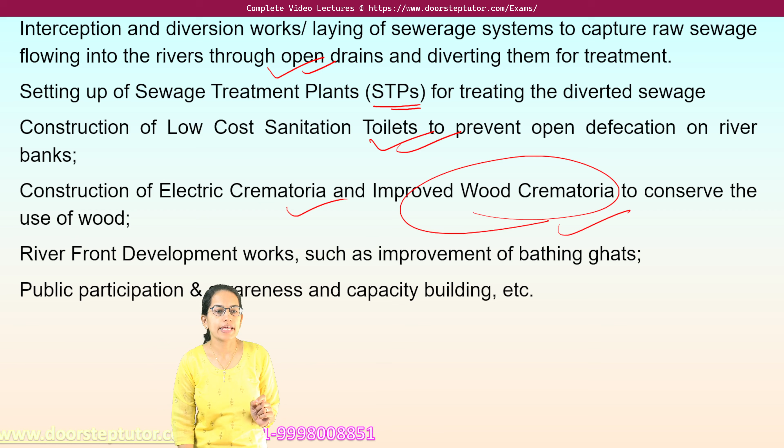To begin with, the ideas that have been laid down under NRCP are: to check out the sewerage lines, to capture the raw sewage which flows into the river through open drains; have STPs, that is sewage treatment plants, as and where required, and divert the sewage wherever required; build low cost sanitation toilets; bring electrical crematoriums or improved wood crematoriums to conserve wood in case it is a wood crematorium; and development of bathing ghats, development of riverfront parks, people's participation, awareness, and educational programs, and so on.

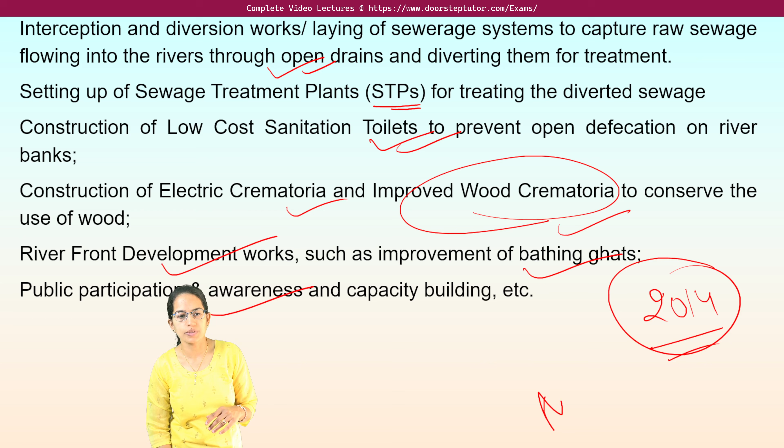From 2014, all the works related to Ganga and its tributaries have been transferred to Ministry of Water Resources, River Development and Ganga Rejuvenation. That means Ministry of Environment, Forest and Climate Change is implementing the projects for all other rivers except Ganga. For Ganga river, it falls under Ministry of Water Resources, River Development and Ganga Rejuvenation. That's really important to understand.

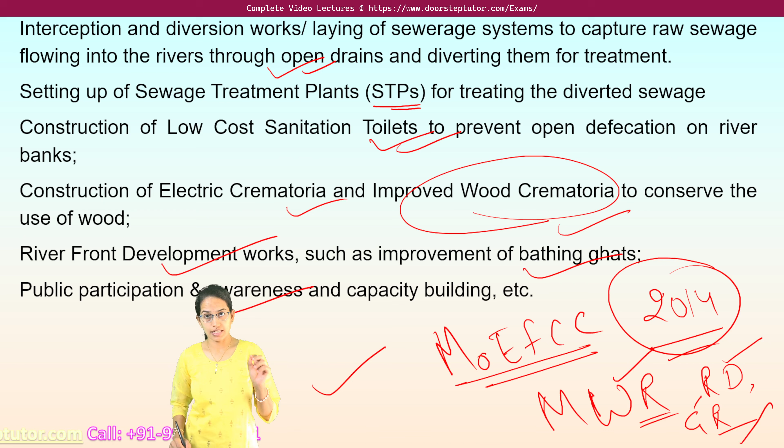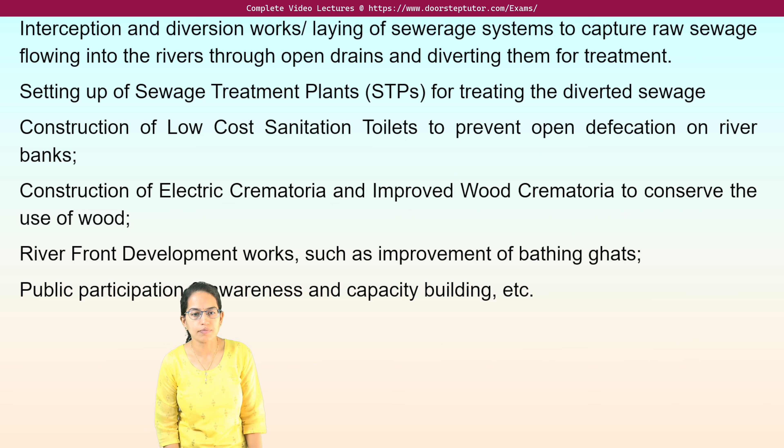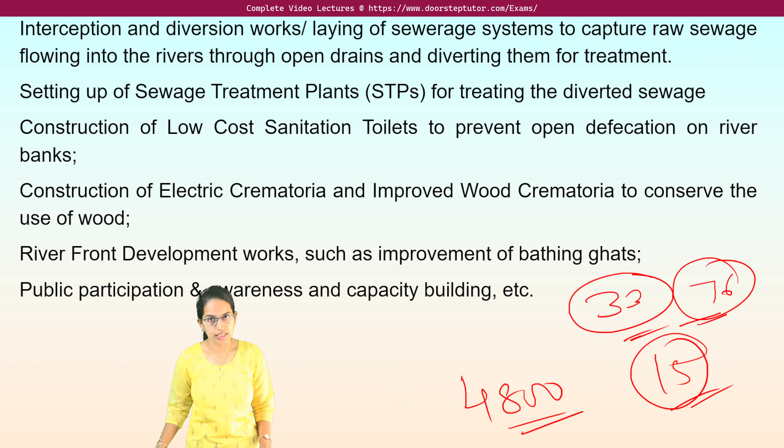Under NRCP, as of now, all the major rivers are included except Ganga and its tributaries, which covers nearly 33 rivers, spread across 76 towns and 15 states, with an allocated budget of more than 4,800 crores, which is a surmountable budget. Initially, when the project was brought, most of the funding was on a 100% basis by the center. Later on, the rules were changed and this became a 50-50 center-state partnership.

I repeat again, nearly 45,000 kilometers of river length that India has, with nearly 12 major river basins, 46 medium river basins and 14 minor and desert river basins. Ganga is the largest, which lies in 11 states, but this Ganga is taken care of by Ministry of Water Resources and River Development and Ganga Rejuvenation.

However, all these 33 rivers which fall under the NRCP, National River Conservation Plan, come under the Ministry of Environment, Forest and Climate Change. And the idea is, be it Ganga river, Yamuna river or any other river, linking the culture close to the tradition. These rivers have been the lifeline of the people, and rejuvenating those rivers has been important. So the present coverage of NRCP, as we already said, includes 14 states, 75 towns, 31 rivers, which is now increased to 33 rivers.

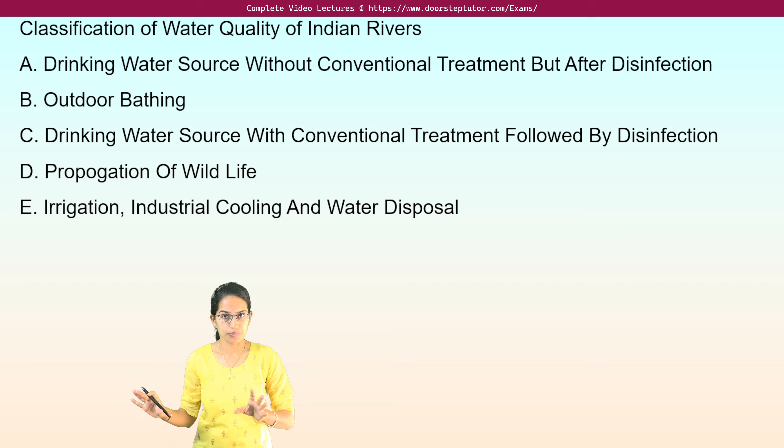The next category is water quality safe for bathing purposes. The second requires conventional treatment, including disinfection. The next is water quality suitable for wildlife, and water quality useful for industrial purpose, irrigation, or disposal purposes. So these are the 5 broad categories.

Now, the standards have to be met for each of these categories. For example, for bathing quality you have 4 criteria. The biochemical oxygen demand should be maximum 3 milligrams per liter. The dissolved oxygen minimum 5 milligrams per liter, and coliform, which is the fecal matter, maximum permissible is 2,500, with a limit from 500 to 2,500. That is for bathing, and the most probable number here is 100 ml.

Now all these terms, what is BOD, what is dissolved oxygen, what is COD, we have covered in a separate lecture, so you can go back and check that lecture if you want more details.

The next is standards for treated sewage under the NRCP: if the BOD is 30 in a water body or 100 on land, that needs to be treated. For TSS of 50 and 200, the total suspended solids should be treated. Then coliforms around 1,000 to 10,000, that's the range they have to be treated to, and for bathing they have to be brought between 500 to 2,500. For drinking it is further reduced, and that's how the process works.

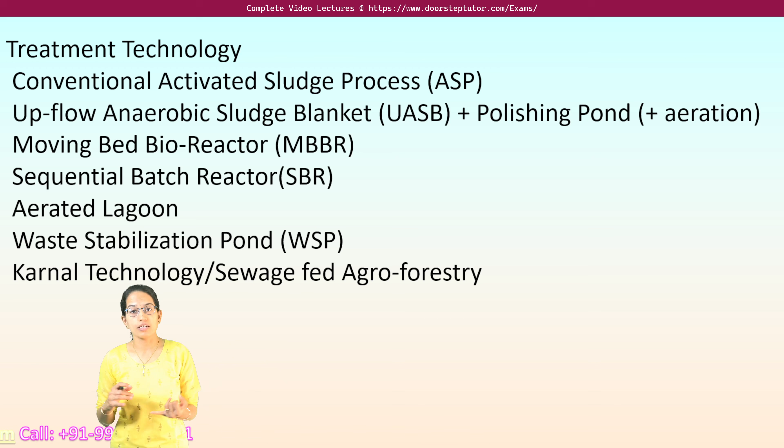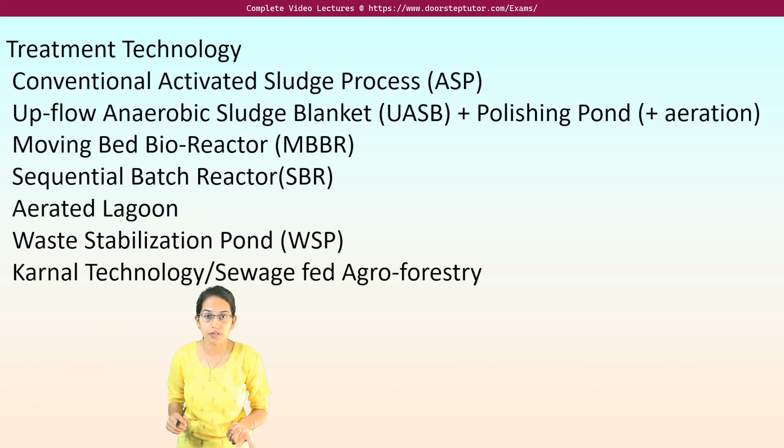Now, the most important thing to understand is that whenever we talk about projects related to river conservation or other conservation programs, there are numerous challenges they have to face. For water conservation, what could be the challenges? Infrastructure is one. Finance, the amount of funds flowing in, is another. The next is that the treatment capacity of each plant is fixed. How can we tackle point source pollution? We can identify the areas from where point source pollution is coming, but what about non-point source pollution? So those non-point source pollutions...